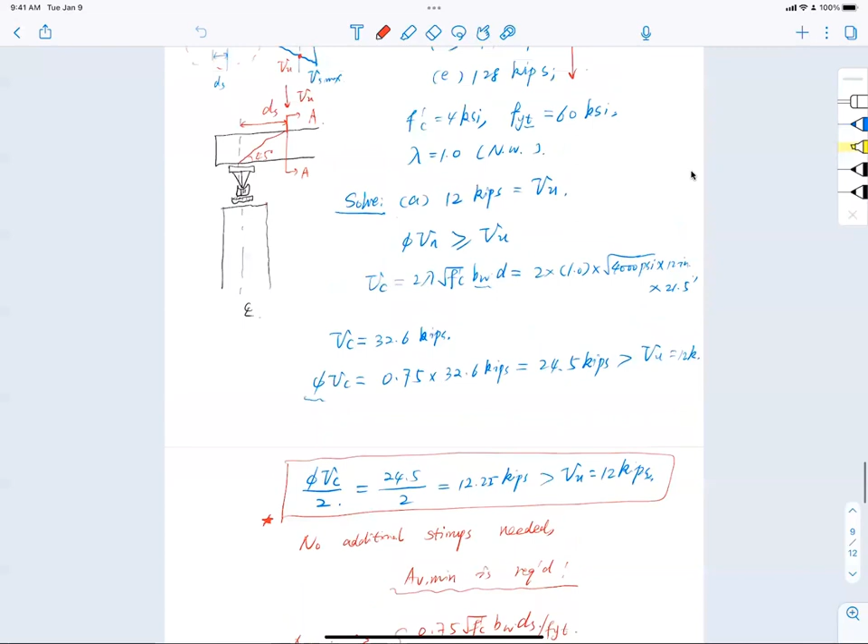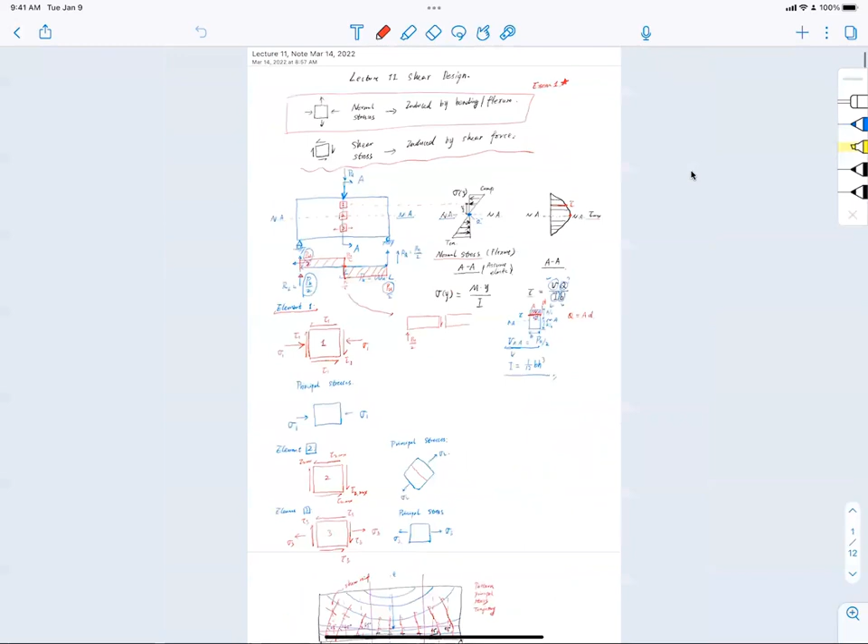Okay, so shear, right? Let's get back to the main content today, shear. What do we know about shear? About nothing, right? You said something online, didn't have time to reach it. So what do we learn about shear? Two components in terms of shear resistance. What are those two components?

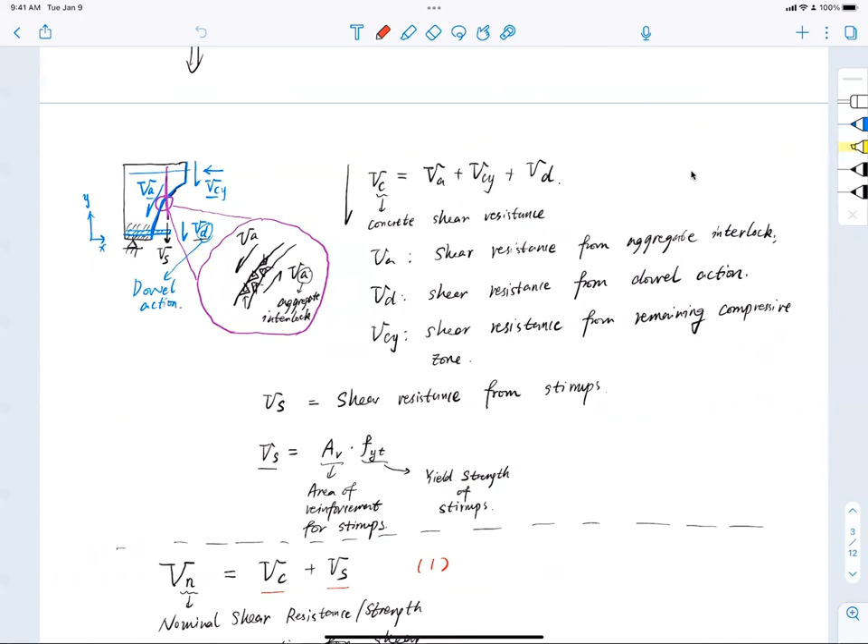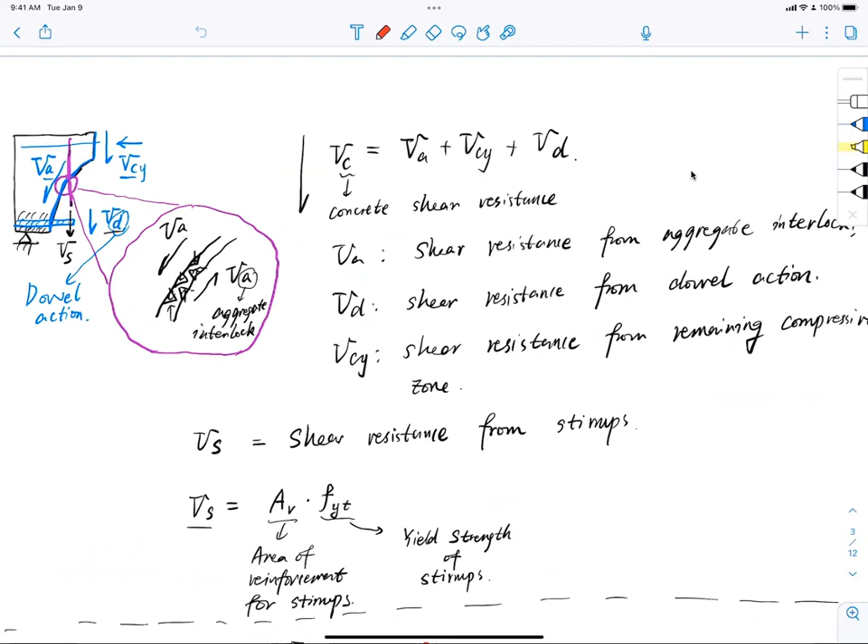Concrete and steel, right, stirrups. So there are two components, one from concrete. And what are the three components that are in the concrete part? Look at this equation, right? VC equal to VA. A represents aggregates. Y, CY, what is that? Compressed field, compressed region. And D represents dowel action. So these three components give you the resistance from concrete, shear resistance from concrete.

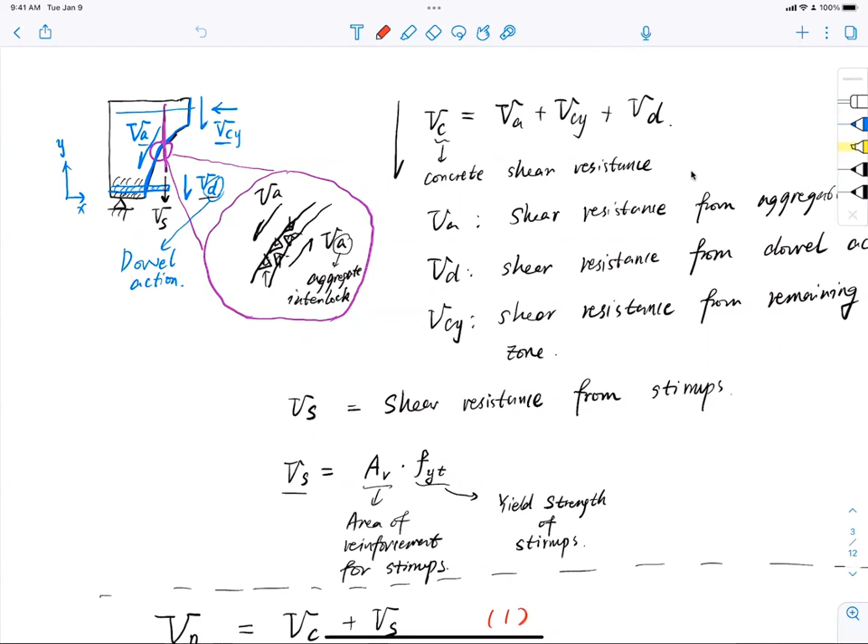Remember this, why is that? There will be a multiple choice problem on this, exam number 2 on this, final exam on this. So that is shear. Now, when we have the contribution from concrete, let's take a look at the contribution from stirrups.

Stirrups, right. So we talk about the area of the stirrups, AV, and the yield strength of the stirrups, FYT. Let me ask you, if I have stirrups just like this, and this is a number 4 bar, what would be my AV?

What would be my AV? First of all, what is the cross-section area for number 4 bars? Area for number 4 bars. 0.2 inch squared. Perfect, right?

So how about AV then? 0.4, right? So 2 times 0.2, and that is 0.4 inch squared. Great, right? What if I have a stirrup, okay?

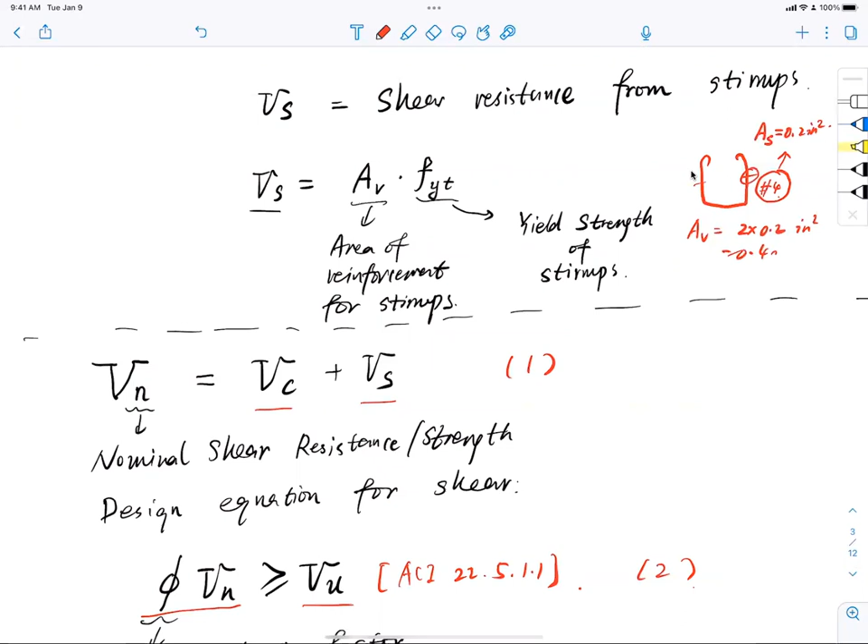You may think I'm joking, but I'm not. If I have a stirrup like this - oh, wrong side. Okay, to give you the full picture, there's another one outside, another one outside. And this is actually a real column in Fukushima, but anyway.

So it's just like a crab, right? How many legs I have? Let's do a count: 1, 2, 3, 4, 5, 6, 7, 8, 9, 10, 11, 12. See, that's it. So it depends how many legs across the section I'm cutting.

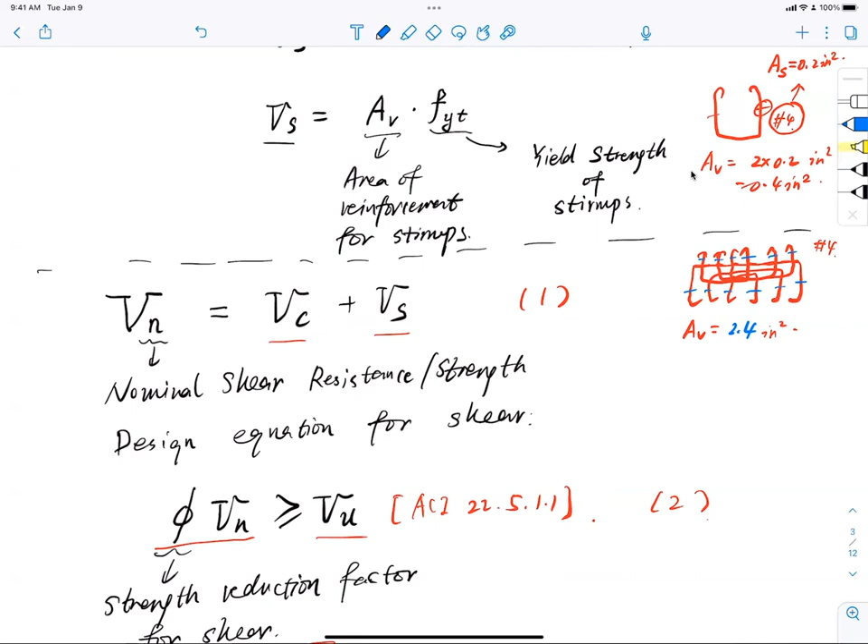What would be my AV? 0.4 still, right? Why is that? Okay, another rule. You think of it, it is a column, isn't it? It is a column, right?

So meaning that I have a column that looks like this. And when I do the shear diagram of the column, my V can come this way, my V can come this way, and my V can come any other way. So it really depends on what is my shear force direction. And you draw a perpendicular line to that shear force direction, and how many legs it cuts through gives you the cross-section area.

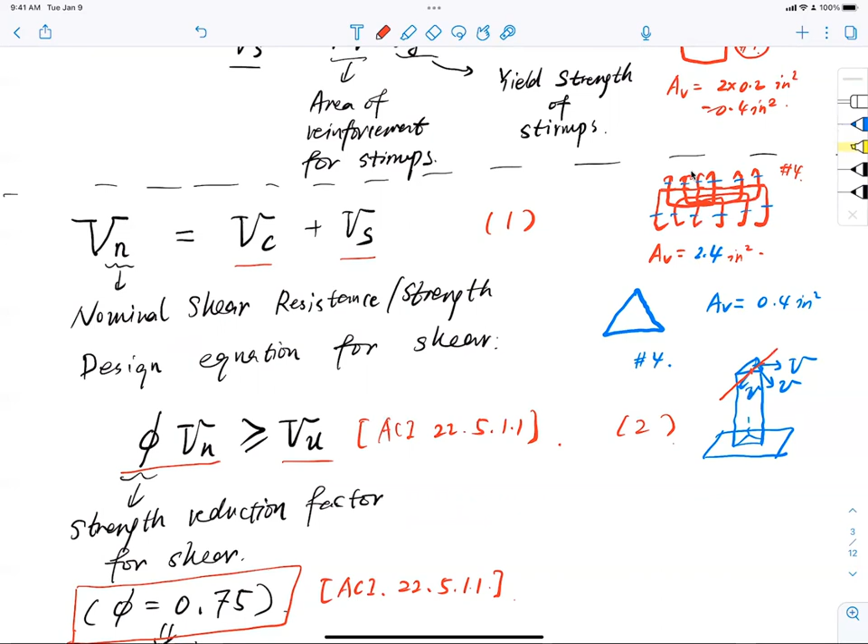Get it? So that's the two principles. One, it depends on how many legs cross the section. Two, the section depends on which is the perpendicular direction of the shear force being applied. So this is very critical.

Now, if I have a beam like this, a double helix column - I built this column myself before - double helix, and have stirrups just like that. In the cross-section view, this is all hidden in the oval shape of a column, all hidden like that. Now, all these are number 4 bars, of course.

And what would be my AV? 1.6. How do you get that number? 1, 2, 3, 4. 4 multiplied by 0.2. Oh, that's not 1.6, is it? I don't know, that seems like 0.8, right? That's okay, that's okay. So what's the other number?

Is this the number you like? Is this the correct number? What is the answer here? It depends, right? Why does it depend? Look at the column - it's an oval column, has 2 directions.

Oval means like ellipse, right? Ellipse - not speaking English for a while now. Ellipse, so 2 axes, right? A, the long axis, B, short axis. It really depends on which direction the shear is coming from. If the shear comes from this way, you're using the strong axis. The weak axis, the flat one.

Bending this way, and then you cut this way. Cut 1, 2, 3, 4 - 4 of them, so 0.8 inch squared. If your shear force comes from this direction, how many legs do you cut?

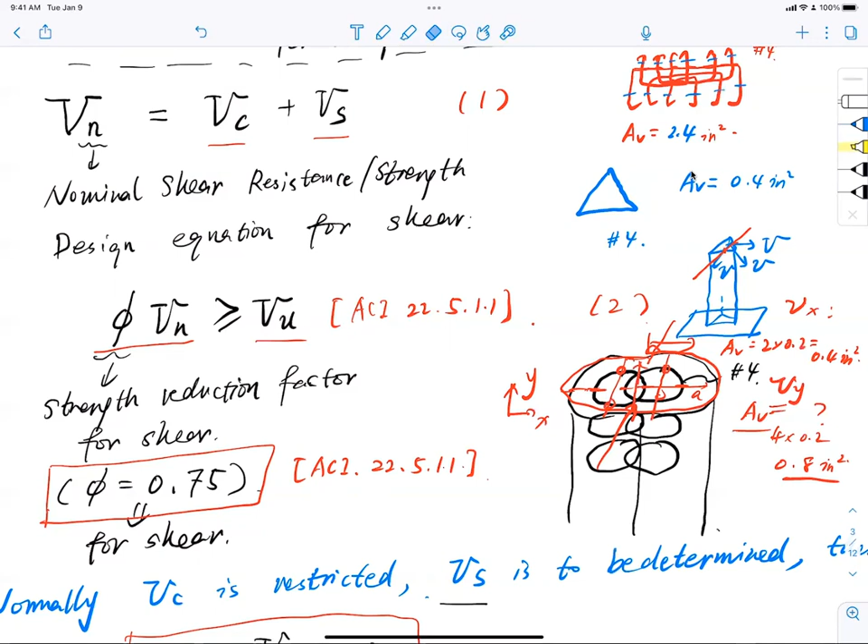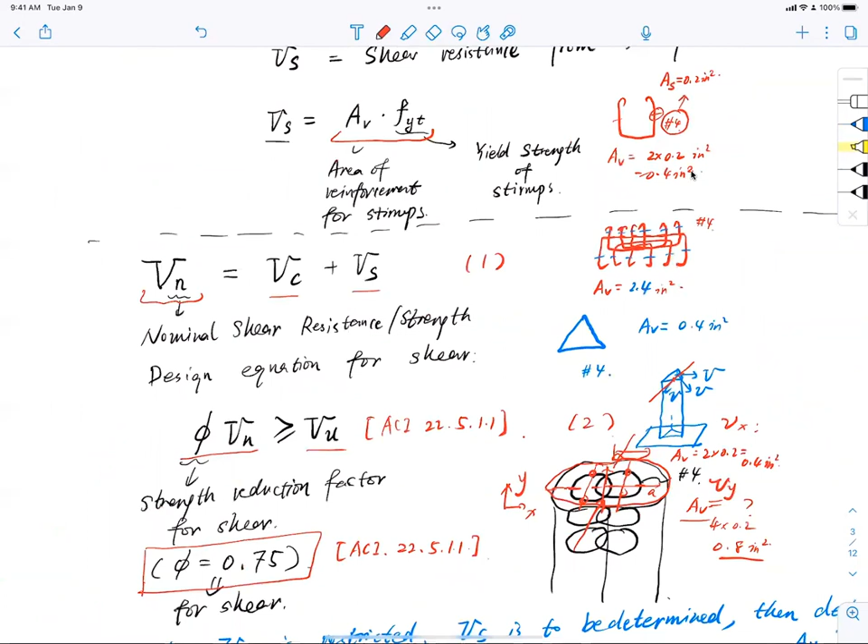So once we have the steel, things are clear. Now AVFYT gives you the resistance from the steel and they add up together. So the total shear resistance has two parts: concrete part and steel part.

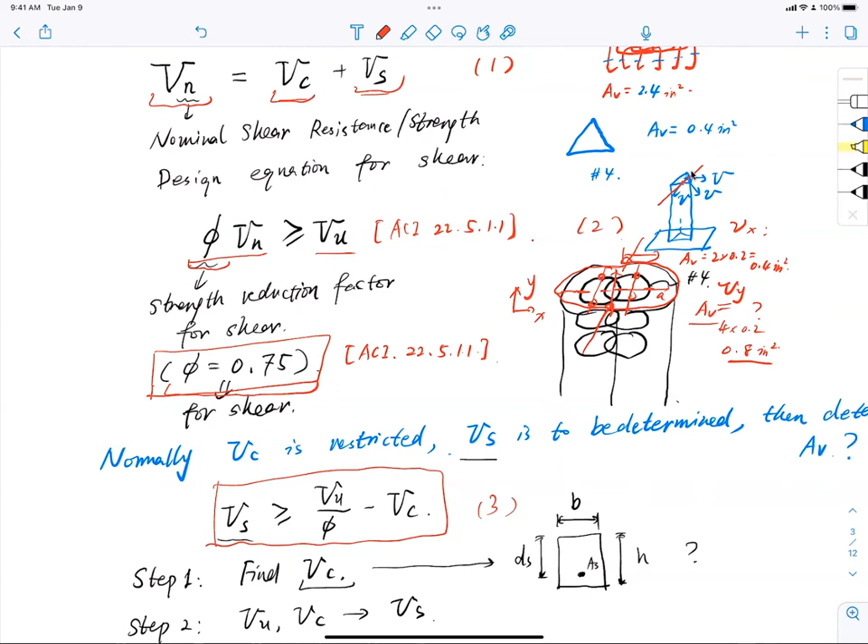And now you have to consider the strength reduction factor, right? Phi is our strength reduction factor. And for shear, what is phi? Phi equals 0.75. And what is the difference between this phi and the phi in the flexure members, in the bending, in the moment? The other one is dependent on epsilon T, right? This one is constant, isn't it? 0.75 always, right?

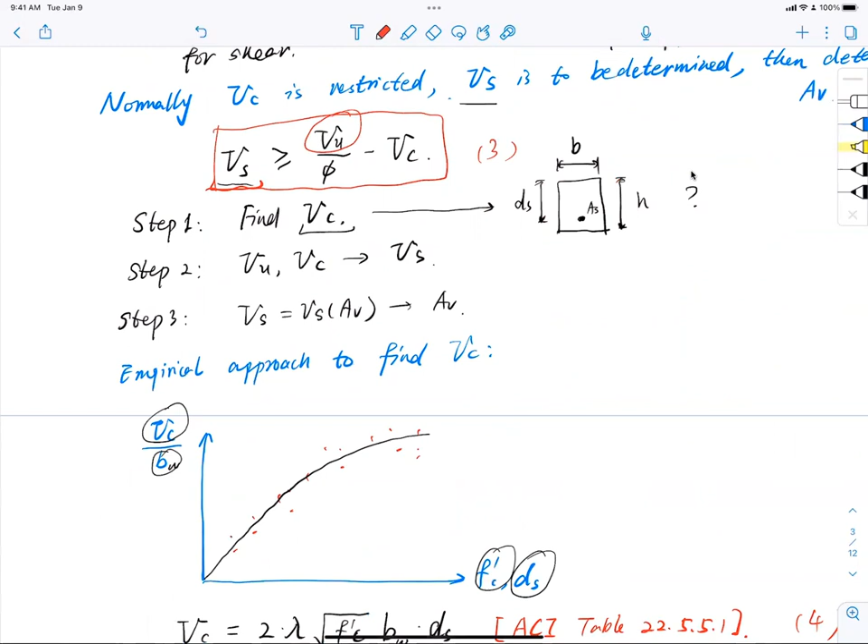So with that, we move on. We say now, just estimate the shear resistance from this equation: VU, that is applied shear, divided by phi, which is the strength reduction factor, minus VC, concrete contribution, and you get the shear force from the steel, shear resistance from steel, okay? And what is the contribution from concrete?

You have this fitting, which means you do a bunch of experiments trying to fit the data. You drew a line, and that line gives you the empirical design equation here: square root of f'c, BW, ds, then lambda.

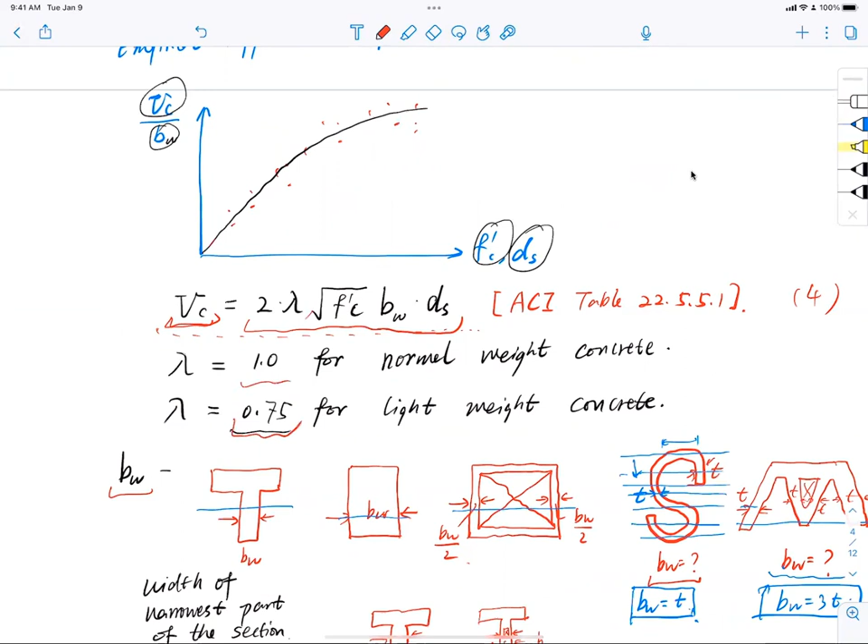Lambda is the weight coefficient, right? Normal weight 1.0, lightweight 0.75. BW is a little bit different - you have to find the narrowest width across any section here. So that's what we talk about.

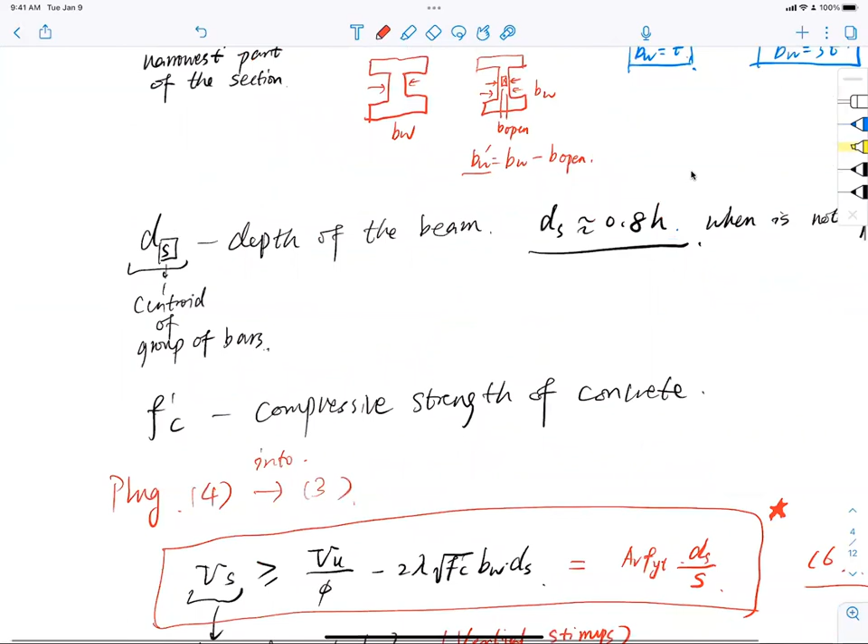And ds, when you don't know ds, when you do design and don't have ds yet, estimate 0.8h. You have to have the section dimension, which is h here. But you don't necessarily have to know where the flexure bars are to give you the shear design, okay?

So if someone comes to you and says, Bob, I want you to design shear for this member, you ask: do I need to know the flexure or not? You don't need the flexure. You can design for shear straight up. You don't have to know the flexure to do shear, okay? They don't go in sequence - they are in parallel.

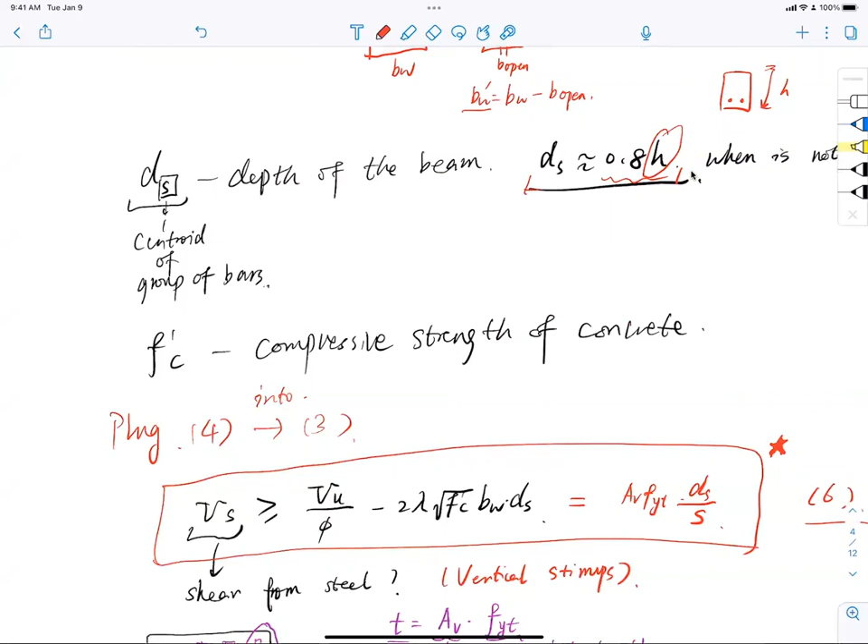All right, so once you have that, you plug in this equation, you estimate what is the stirrups contribution, right? And you use this equation, AVFYT ds divided by s, to find out the spacing. Why is that? In the shear design, stirrup size number 3 and number 4 are usually given - not much of a choice.

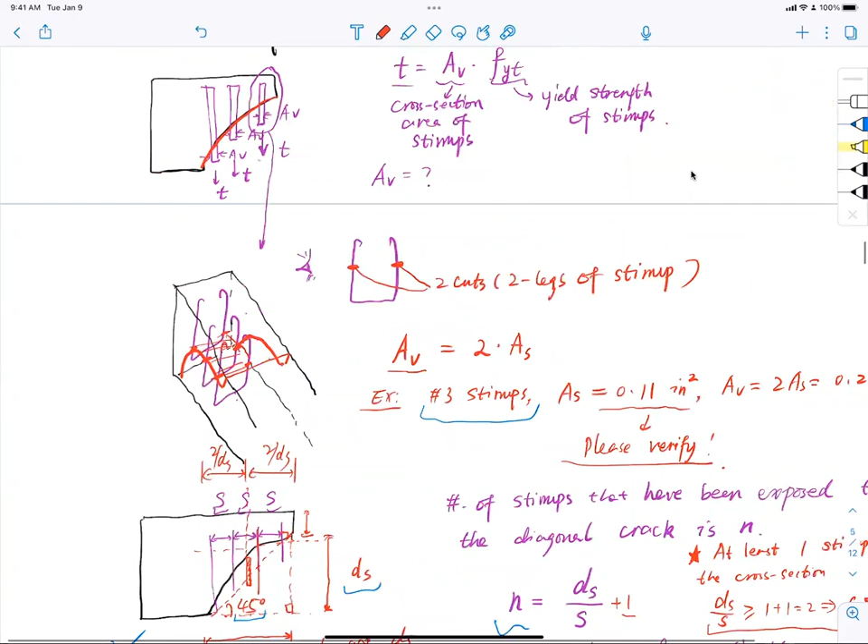All you have to do is design the spacing, the distance between the stirrups, okay? All right, so that's pretty much what we learned, right? And then we have this nice equation here, just like I said, how to remember things, right? So we understand why, and you have summarized everything here.

Take a look at them. Now I can probably memorize them, right? So first equation for concrete, second equation for different stirrups - one's vertical, the other's inclined. But be careful, we don't do incline in this course, right?

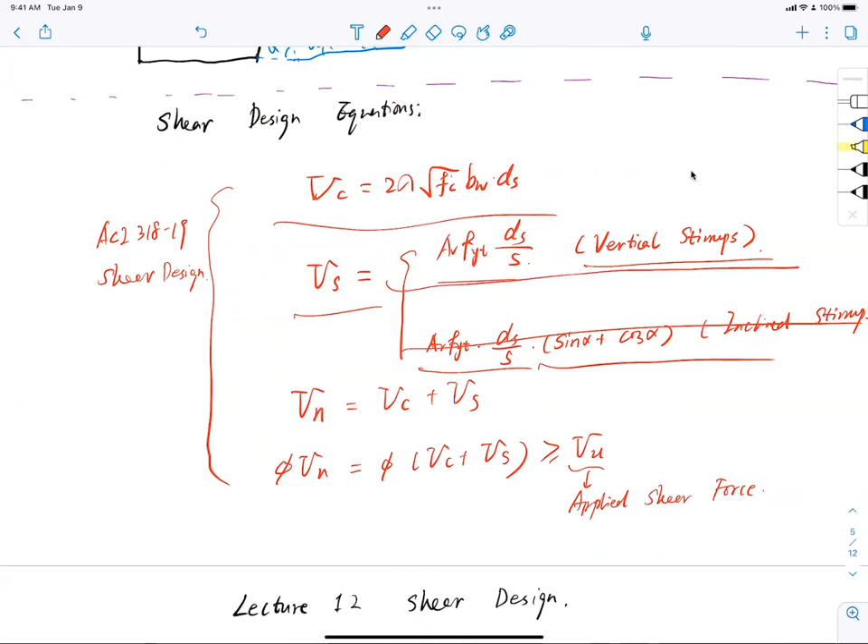Be smart about it, don't need to worry about it, right? No sine alpha, cosine alpha - probably multiple choice, and not even that probably, right? So just the vertical stirrups. This equation is important. Once you have that, you have Vn equal to Vc plus Vs.

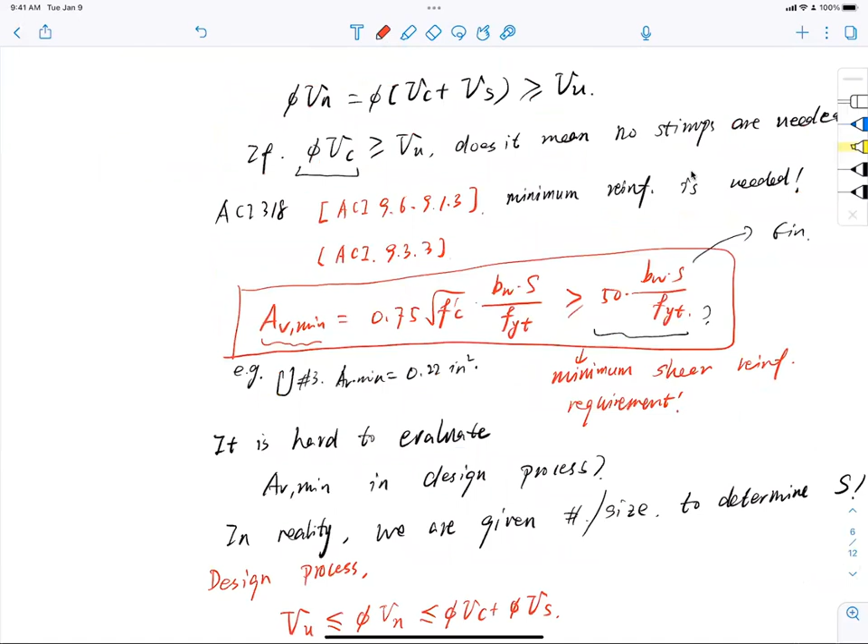You have this equation, and you verify your design process, just like that. All right, but it's easier said than done, right? ACI says you have to have a lot of limitations, constraints, minimum amount of reinforcement.

These two equations, right? These two equations, and it has to be the largest of these two. You say, Bob, you're confusing me - the other set of equations, you say the least of them. Why? Because if you're talking about the minimum area, it's the larger of these two. If you're talking about the maximum spacing, it is the least of them too, right?

They are inversely proportional, right? Be careful, okay? And we'll talk about them. And then after everything said and done, finally, we have our design equation for spacing between stirrups. S required equals this bunch, okay? AVFYT ds divided by VU over phi minus VC. This is pretty much the shear resistance required for stirrups, and so on and so forth.

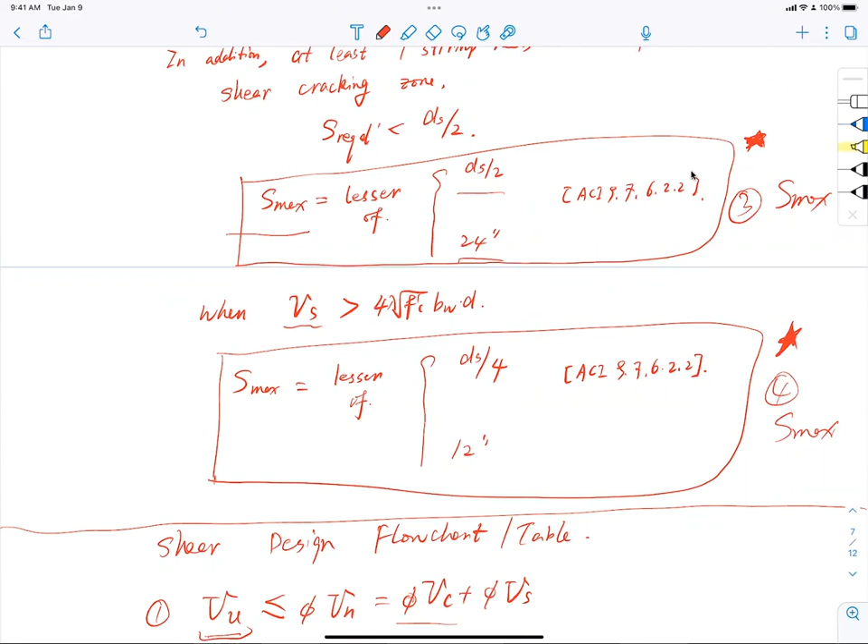And this is the special requirement, and that is in the 45-degree diagonal cut, right? At least have one stirrup present, okay? And also have other requirements. If the shear resistance exceeds 4 times this, change your spacing by half, okay?

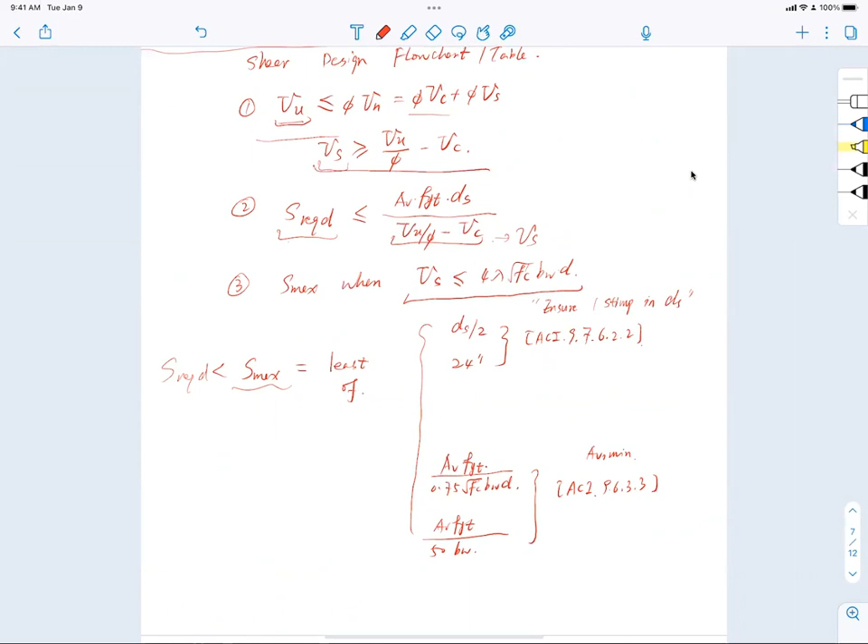And now this becomes a little bit lengthy. So we made an equation here, made this little table here, right? VU smaller than equal to phi Vn. And then you have this resistance for shear, and then required spacing, max spacing, and this max spacing, and this max spacing, and then this, and this. You are so confused, isn't it?

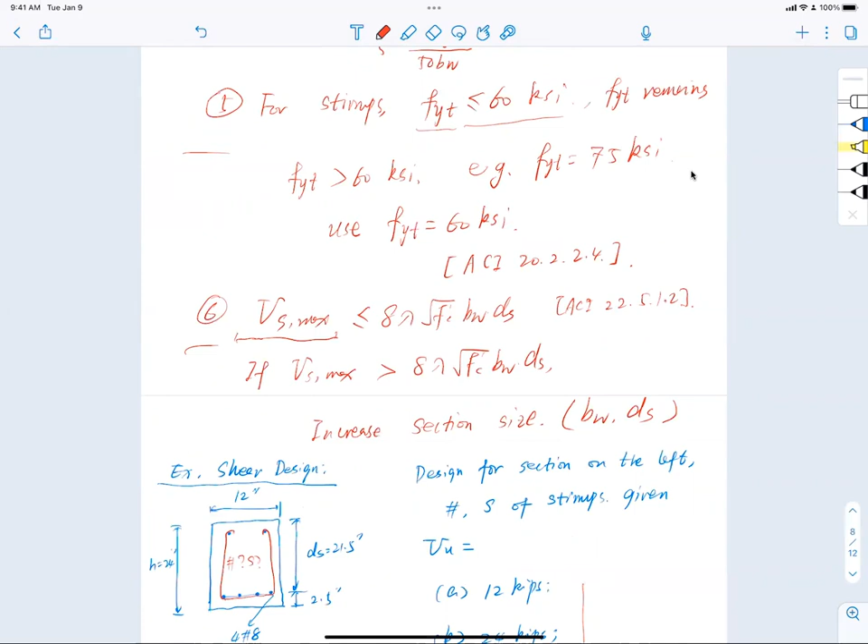I will be, right? So many things. Now, at this point, you say, no, I cannot do this. I have to make myself a table. All right, so before I go back to the example problem, right? I want to make a table for you. Okay, we'll resume all this. Don't worry, but we'll resume this, right?

So with all these equations, I now understand where they come from, but I don't necessarily understand what's the relationship among them. I don't necessarily want to remember them in this way. So I will make myself a table, organize them, and memorize them. How do I make a table? I took a look at things. I realized that it's just 2 criteria I have to play here.

So number 1 criterion is that when phi VC divided by 2 is greater than or equal to VU. All right, so what does it mean? It means that half of the concrete resistance is already satisfied or already bigger than the required shear, meaning you probably don't need any stirrups. Okay, you don't need stirrups because the concrete alone, half of it covers it. So why you need the stirrups, right?

So that's one condition. The second condition is that phi VC divided by 2 is smaller than VU, right? So the concrete itself does not cover it, but phi VC itself, right? Half of it does not cover it, but phi VC itself still covers it. Okay, that's the second condition.

Now the third condition, that is phi VC, concrete itself cannot cover it, but the required shear from the stirrups is smaller than 4 times square root of F prime C BWD. Okay, that's the third criteria, isn't it? So it depends on whether my concrete can cover it or not.

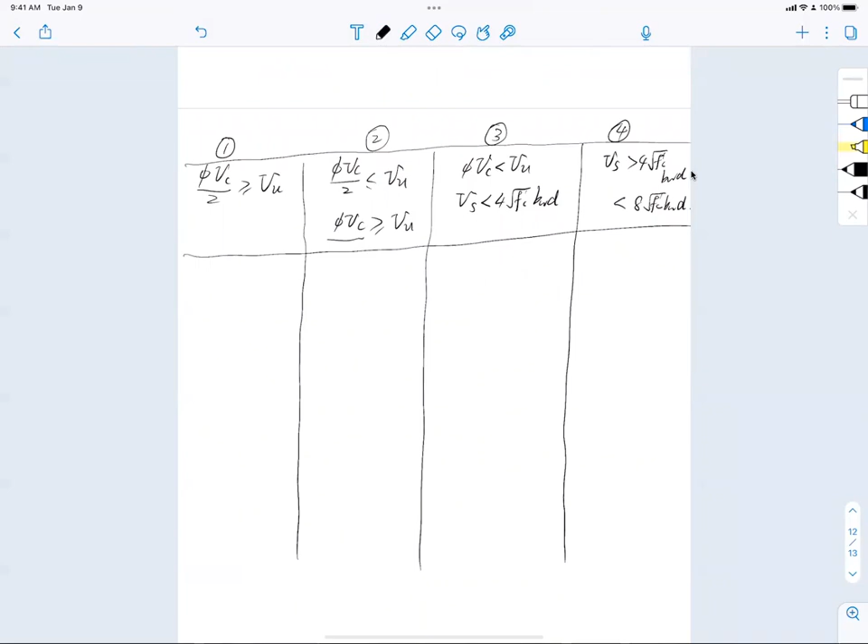And I want to list all my equations into this column. So with these conditions, what are we doing? We're designing a design table for what? For stirrups, right? Stirrups, 2 things: area is not the control. But the other thing, what is it? Spacing between the stirrups is in our hand, right? So we're essentially designing for spacing S.

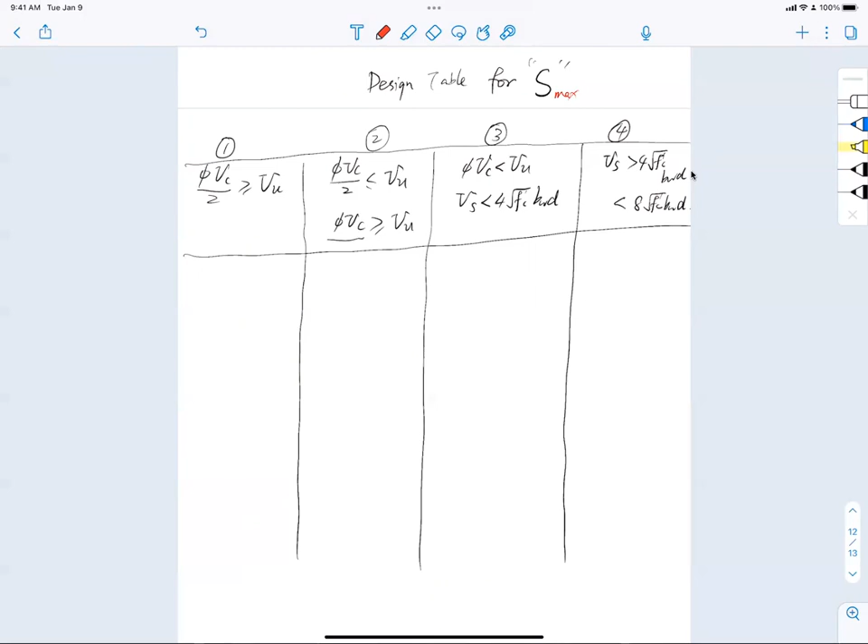Okay, and to be more precise, we are designing for what? The maximum spacing allowed to arrange the stirrups, right? You pretty much can put stirrups any space you want. If you want to, I can put them like 1 inch apart, just enough to get aggregate through it, and that should withstand any shear I want, right? But you don't have to do that because there's a maximum spacing to give you so you can reduce the cost by putting less stirrups in it, isn't it?

So that is what we're designing for. Now understand that, then the following equations become, all these are for S max. Okay, all these are for S max. So out of these 4 conditions, the first one, when this happens, half of the concrete resistance is already covering the shear. I only need to provide the spacing, and let me just use this color back: FYT, AV, divided by 0.75 square root F prime C BW. And immediately you realize that this comes from the minimum shear reinforcement requirement equations, isn't it? I just manipulated and made it this way.

Now the other one, of course, is another equation, right? Same thing, AVFYT divided by 50 BW. That's it. So that means if I fall into this category, I just need to compare these two, find out the larger one or the lesser one.

Least, the smaller one. Why is that? If I were to design for shear, which way is more conservative - to put the stirrups closer or farther apart? Closer, isn't it? So of course the maximum spacing has to be the lesser of the two.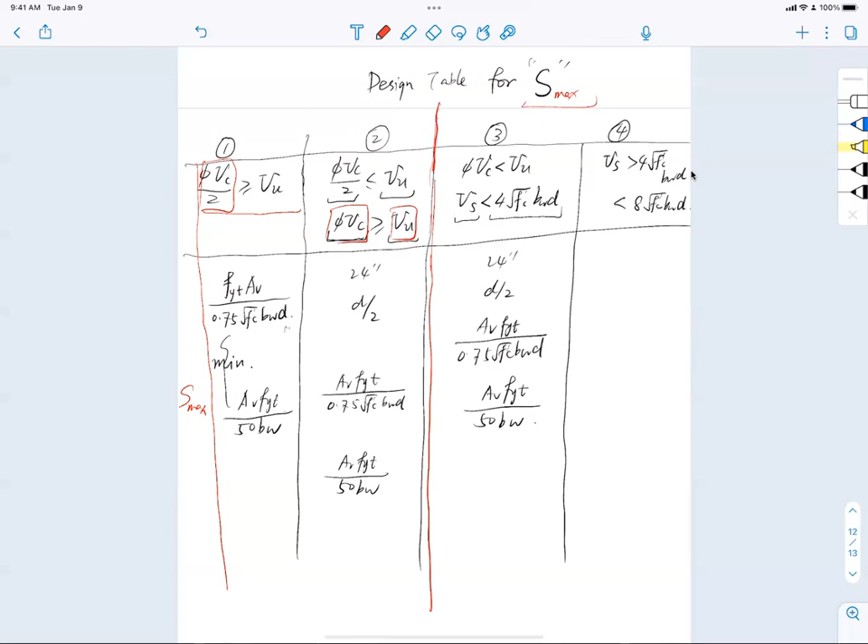So on the left, no VS calculation needed. I don't need to calculate how much shear contribution from the reinforcement at all. I don't care, I put all these equations down - nothing to do with applied shear, nothing to do with the stirrups basically. Minimum reinforcement requirement, that's it. ACI says so, so I have to put it there.

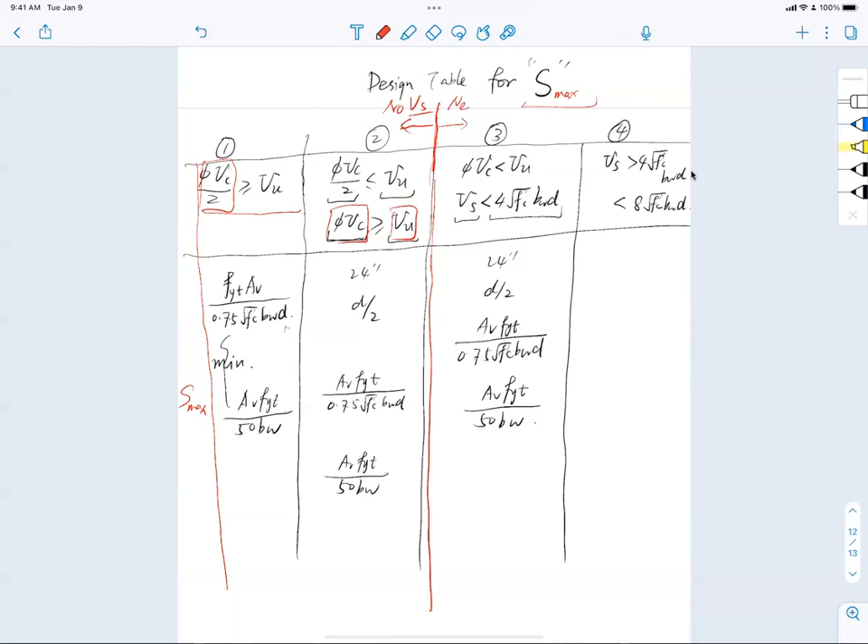Now if I move to these 2 categories, I realize I need to calculate the required shear now. Why? Because concrete itself cannot do it anymore. So this right here has to be S required. And what is the equation for S required? Do you remember it? Come on, help me out here. What is the equation for that? Required spacing.

AVFYT - always start with AVFYT on the top, and then DS, then... right, so that is VS. So what is VS? VS equals VU divided by phi minus VC. And what is VC here? VC is 2 lambda square root F prime C BW DS. See, box it - got to do the calculation now, cannot be lazy anymore. Got to do calculations now, right? So that is added elements in category 3.

All right, moving on from category 3 to category 4. Pretty much the same, only thing that changes is VS is greater than 4 times square root F prime C BWD. So I need a whole lot of shear from the stirrups. And when you do that, ACI says be careful, you got half your spacing - 24 inch requirement becomes 12, and half of D requirement becomes D divided by 4. This is called spacing half, just to be safe.

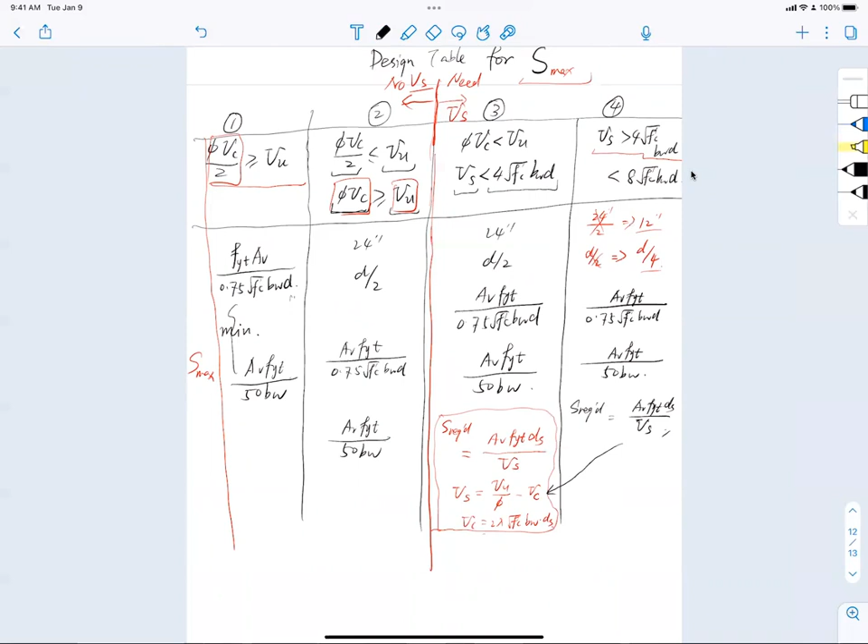Now with this, I'm pretty powerful. I feel pretty good. Now I can handle all the things I want to handle. So I go back to the example problem. Take a look at it.

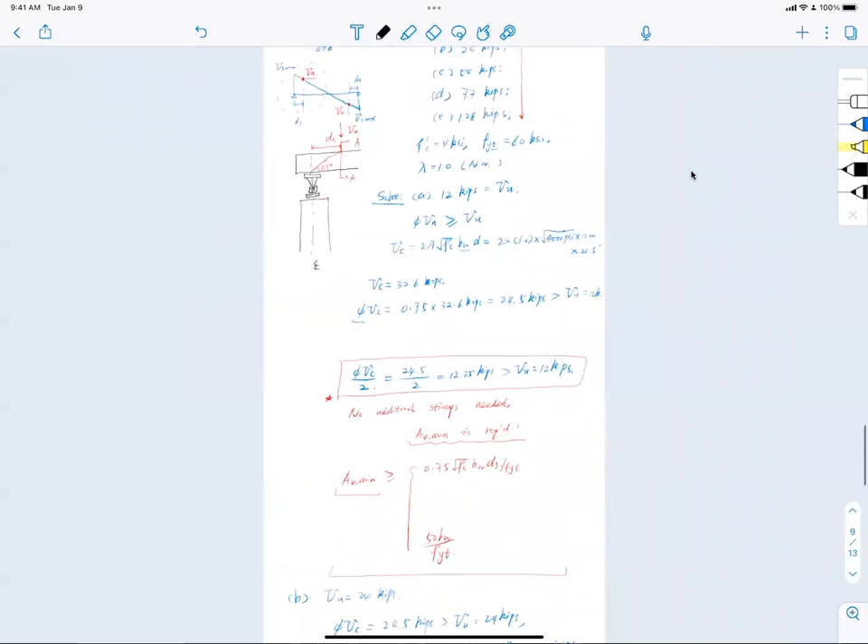So now you see the problem, you realize, now I understand it. You're very cunning, very smart, right? You program this problem like that. What am I doing here? So you think of it - basically just like the table, right?

First category, this is what? Half of phi VC covers the required shear - this is probably the first category. See, I'm manipulating things, I just want to show you. Second category, phi VC itself covers the shear, isn't it? Third category: less than 4 times the square root of f prime C, BWD.

Smaller than that, this is what? Bigger than 4 times, smaller than 8 times - this is what? 8 times. Do you see it? So I'm not smart, I'm just like you, but I know more, so I make it look like I'm smart. I'm not, you know. That's how the game's played. So that's how we play.

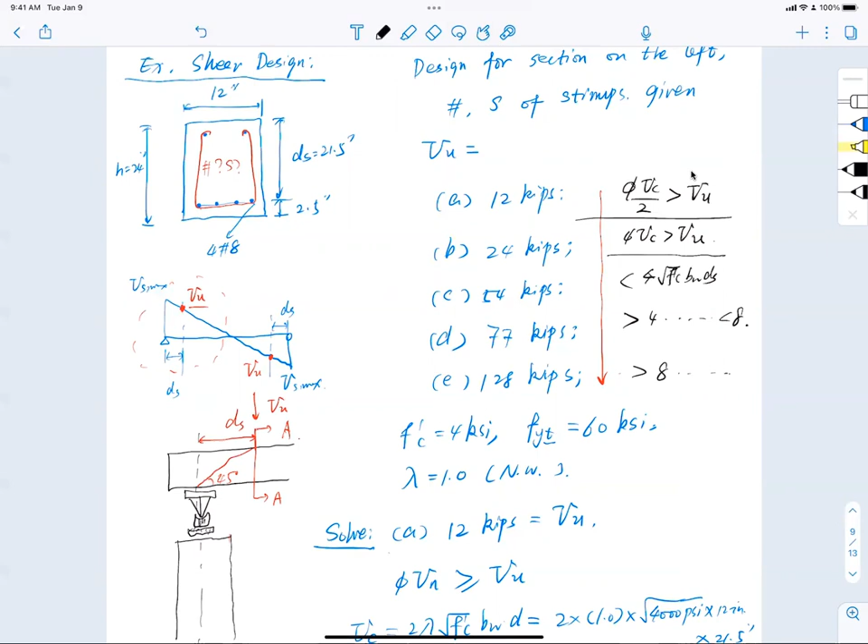So where are we at? We talked about this problem, done. Let's take a look at C equal to 54 kips. C equal to 54 kips. Okay, so how about it?

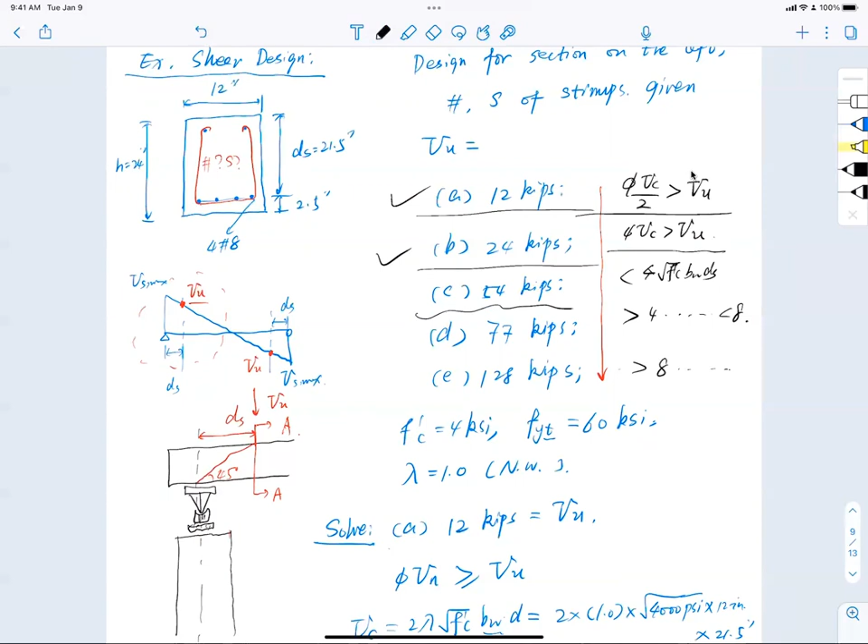Let me show you. Now C equal to 54 kips - VC equal to 50, VU equal to 54 kips. That means number C here, VU applied shear, that is 54 kips of force. Now VC stays the same because the section stays the same - we haven't changed the section yet, and that is 24.5 kips, which is smaller than the applied shear, which is 54 kips. So in this case, you say stirrups are needed.

And well, we're at it - which category is this one? Take a look. Definitely not this, definitely not this. Is that this? Might be, right? What is the difference? 4 times of this.

I need to check that. So now I think of it, hold on a minute, let me do that. Before I do everything else, let me just check that. So 4 times the square root of f prime C BWD - I know how to use that, so might as well put it here.

So what is this? 4 times square root of 4,000 PSI of the concrete, then multiply by BW. What is my BW here? 12 inch. And what is my depth here? 21.5 inch. Now I didn't really have this number worked out - please help me, can you pull out your calculator and get this number for me?

65 - you read my notes? 65, right, that's right - 65.3 kips. How did he know that so fast?

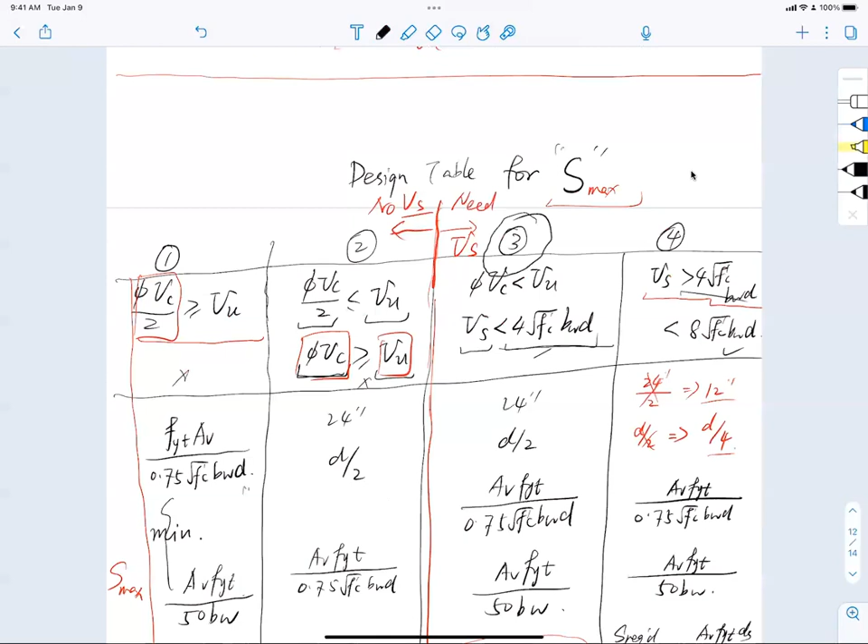Which category are we in? 1, 2, 3, 4? Category 3. So you have a table, use it. Category 3, so there are other equations.

What other equations do I need to use? I need to check all the equations. So I just put these equations into my solution sheet and solve it, just like that. Simple, right? So now let's take a look at this.

So with this, I know this is what it is. These equations are for S max, which has to be the least of the highest requirement. Let's list all these equations: 24 inches, fine. DS divided by 2, 21.5 inch divided by 2, what is it?

What is 21.5 divided by 2? Come on, we calculated this before. 10.75, great, thank you so much. And then AV FYT divided by 0.75 square root f prime c, BWD.

What is this? Let's write it out. What is AV? 0.22 inch squared. And what is FYT? 60 KSI. Divided by 0.75 and multiply by square root of 4,000.

Okay, clear this out. And then BW is 12 inch and DS is 21.5. Can I get this number on it? We did this before, you can see from the previous notes. What is it? 20...

3.2 inches - we did it before from last lecture. All right, so now with that, AV FYT divided by 50 BW, same thing: 0.22 inch squared, multiply by 60 KSI, divided by 50, multiply by 12 inch.

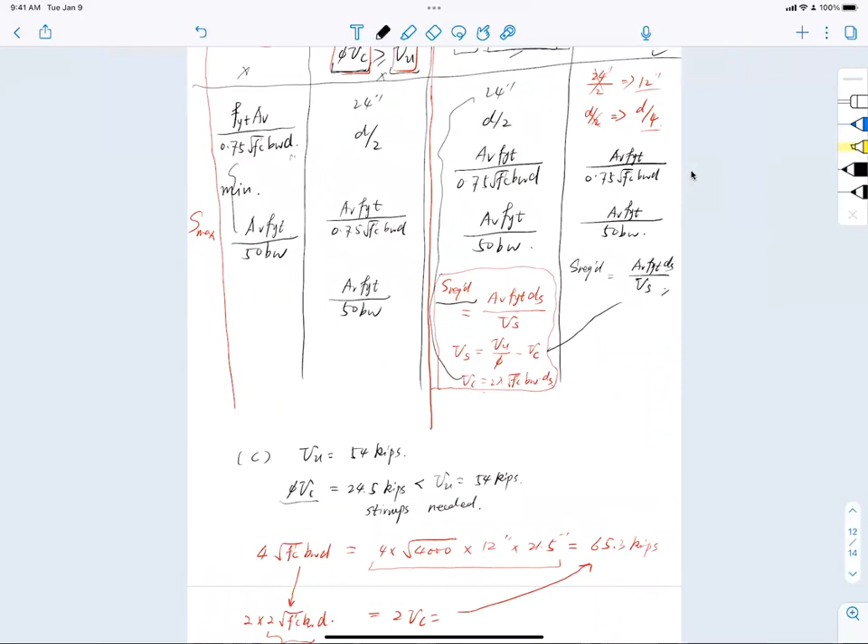So S required is an added item here. To do that: AV FYT DS over VS. So AV FYT 0.22 inch squared, 21.5 inch, divided by VS. What is required here? Let me go back, take a look - that is 39.3 kips.

So 39.3 multiply 1,000. Multiply 1,000, and you multiply 1,000 on top to make it PSI, or you can do this - it really depends on you, because top is KSI inches squared, bottom is kips.

Okay, so I really don't have this number mapped out. Please help me: 0.22 multiplied by 21.5 multiplied by 60, divided by 39.3. Let's try it, let's try it, see what you get. How much do you have?

7.22? Do I get the same? Do I get a second? Yeah, yeah, yeah, all right. Okay, I got 7.26, but that's fine. Let's go with 7.22 inch.

Are we supposed to be using... oh yeah, did I do this wrong? Yeah, I did. No, no, no, we're using this one. What are we supposed to be putting in, 60 or 60,000? It's 60 KSI, right? It's the yield strength, FYT, 60 KSI.

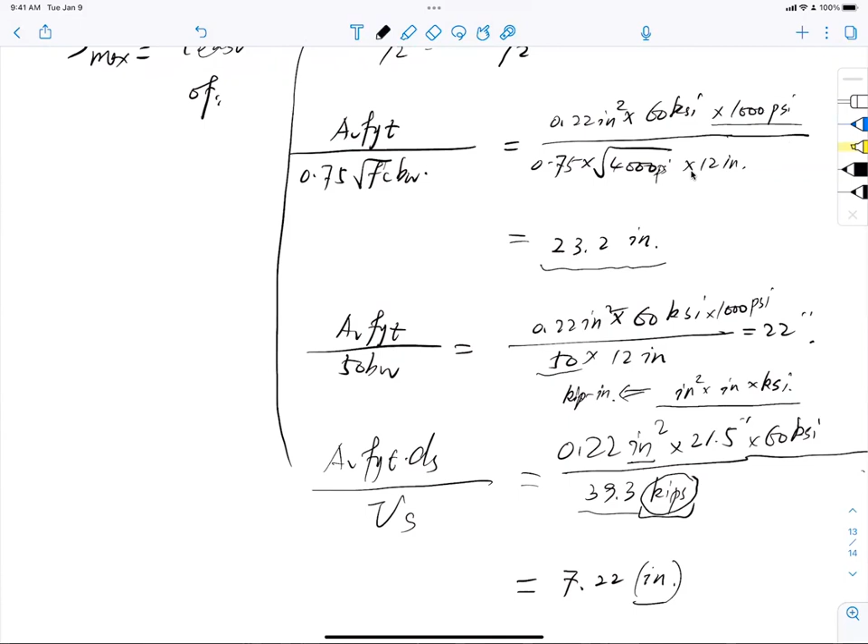Maybe that's just my typo. Do you get the same or different result? Try it again. You got the same, right? So I made a typo—DS should be removed, okay? Sometimes I slip things, okay?

Is there no DS, right? No DS. Okay, so let's check the unit. Sometimes I make a typo. It's been so long, but let's check the unit, just to make sure we're safe.

So AV is inch squared. On top, this is inch squared multiplied by KSI, so I get KSI times inch squared, which gives me kips, 1,000 pounds, right? On the bottom, I have BW, which is inches, and square root of F prime C should be PSI, right? So let's just say PSI, pound per inch, PSI inch squared. So this gives me pound divided by inch.

Is that right? Is that right? Yeah, I think so. Yeah, the unit is somewhere messed up, right? Unit messed up, okay. Let me put a pin here and go back and check the unit, okay? I promise I'll get back to you tomorrow. Check the unit—I think something's messed up here. Let me get back to you on this tomorrow. Haven't done this for a while now.

Sorry about that. Anyhow, do you get 23.2 now, Natalie? Okay, you're good. All right, so now this is the correct number, 23.2 inches.

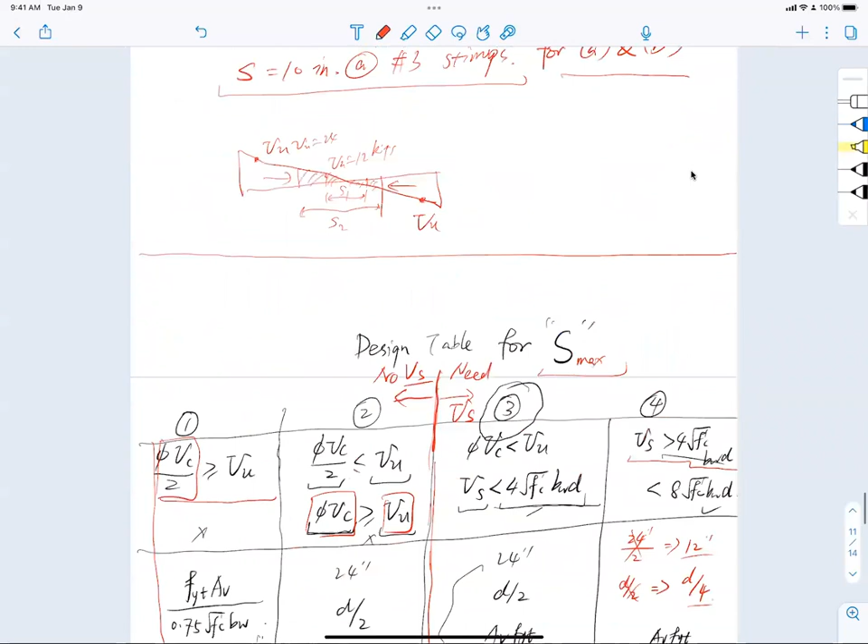I think that's the last mistake, but let me know if you find more. Sorry, like I said, nervous system gone haywire today. Anyway, so S max equal to 7.22 inches governs—that's the base number.

What does that mean? It means I need to put my stirrups within 7 inches of each other. You go tell Joe Bob on the field, say put the stirrup 7 inches apart from each other—what do you expect me to do? Well, I don't know, but I will chew my tobacco and say sure.

Right? And I just put them at what—I don't know, half a foot, because 6 inches is easier, isn't it? Why? 7 inches is a strange number. Nobody will build a jig for 7 inches, isn't it? So at this point I would just tell my constructors, look, fine, if you want to put 6 inches, put 6 inches. That's good for me, isn't it?

So I will go with the design. I say now, design for number 3 stirrups at 6 inches. Be done with it. Okay, get it? All right, good deal. So that's how that is done. Okay, that is how it's done.

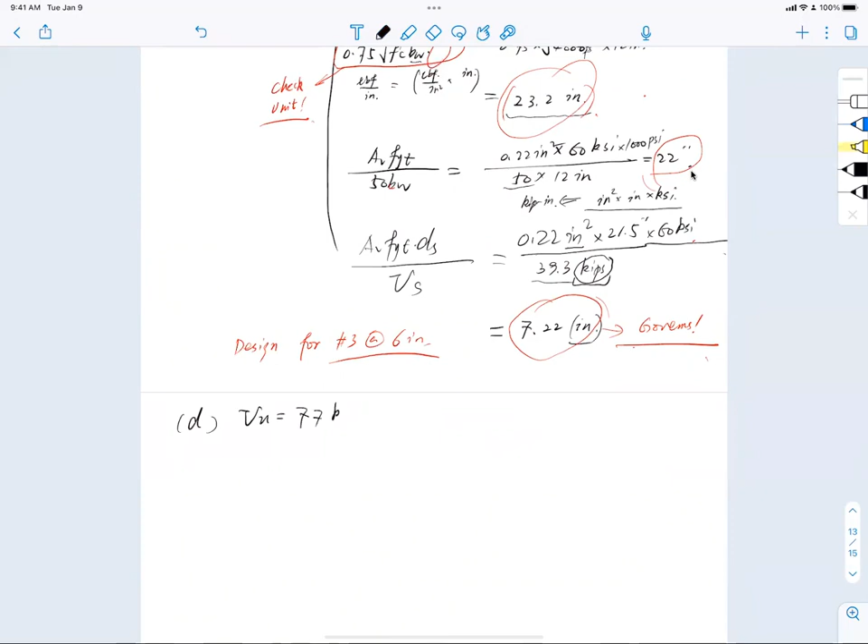All right, so moving on. Now with that, I say D, VU, bump up a level, 77 kips. VU, 77 kips, okay. I know from the story how it's engineered—this is probably going to be category 4. I know that it's coming, but I still need to check that. So 77 kips applied shear—that is bigger than phi VC, right?

Okay, save you the hassle. Don't forget, we are at a critical point here. We're at category 3 and we're bumping into category 4. How do we know we are in category 4? What did we do in category 3, problem C there? We check with 2 things, right?

So this VS required, I want to see if it's 4 times square root of f prime C BW d, or I want to also see whether it's under 8 times square root of f prime C BW d. So what is this? This is 2 VC, right? VC is 32.6, so 2 VC is 65.3 kips. And then smaller than 70 kips.